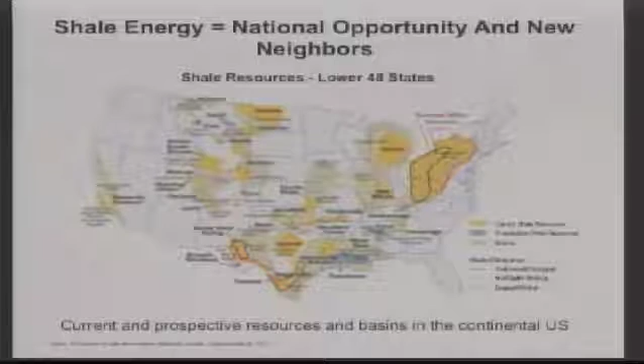We've got a great opportunity in this country with these shale areas to become energy independent. We're already, I heard the other day, number one in oil production, which I found hard to believe. We're building up a great reserve of natural gas. We're looking now to export natural gas rather than import it. But that being said, we've got to do it in the proper way and be careful and be safe. We owe it to the people that live around us and in our neighborhoods to do the right thing. So, again, I want you to understand that we think we're trying to do the right thing moving forward.

There are three phases - you all know the three phases of gas transportation. Understand that every stage is regulated in some aspect, not necessarily by DOT. You have your upstream, your exploration and production, your midstream, which is where your gathering falls. We take the product out of the ground, we treat it, we compress it, and we deliver it to the downstream transmission companies that carry it cross country and deliver it to you folks for your everyday use in your homes.

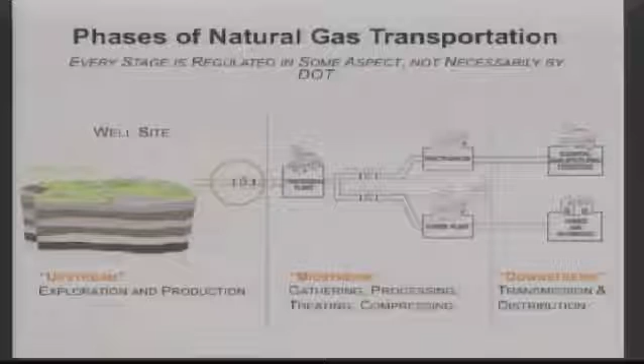Who oversees the safety of gathering lines? Well, the federal government ultimately starts the process. They have jurisdiction over all gathering lines, but some of those are exempted from the requirements found in Part 192.

States, and many, as you'll see here, have gone over and above the federal government. States can have regulations more stringent than 192, not less stringent. States are looking at these lines and deciding if and where they need to be more stringent, with regulations over and above. We're seeing things like construction reporting, additional corrosion control requirements, and most companies putting their lines in damage prevention programs and including many of their assets in public awareness.

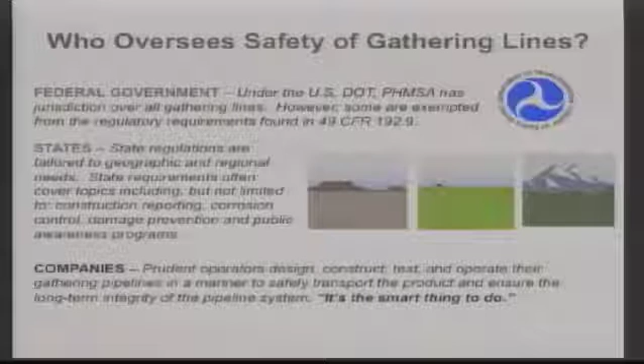As a company, we want to design, construct, test, and operate those gathering lines in a manner to safely transport the product and ensure the long-term integrity of our pipeline systems. It's a smart thing to do. If we're to promote the use of natural gas and these resources in this country, we don't want to have the negatives, the consequences that Carl talks about. Those are bad for our business. They're bad for everyone involved.

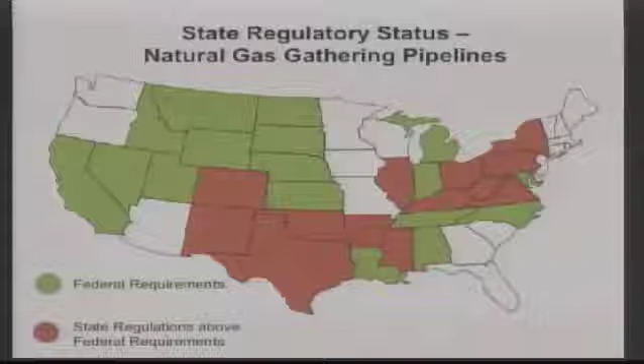Here are the states that you'll see in the reddish color that have some regulations over and above the federal requirements. We think these states do have some gathering or production. For example, the state of Ohio is taking it upon themselves to make all Class 1 gathering associated with hydraulic fracturing, the new stuff going in the ground, regulated. We're going to talk about class here in just a second. But it'll give you an idea that there are states out there that are active.

And for the most part, most gathering lines are intrastate pipelines and would fall under the auspices of the state agency that works with PHMSA.

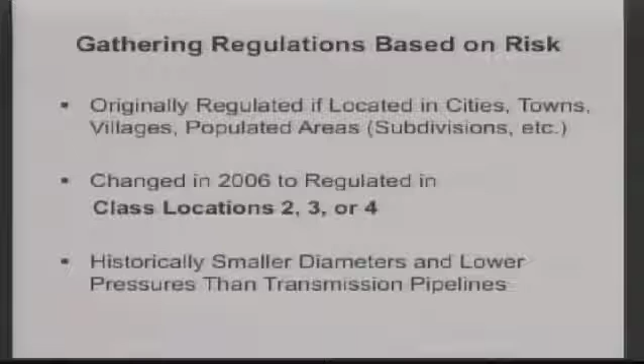Traditionally, gathering lines have always been based on risk. The original rules that came out in 1970 said that if a gathering line is located in a city, town, village, or populated area, such as a subdivision, that portion going through those would be regulated, associating the regulation with population density. With the gathering line rules changed in 2006, that was changed to say we, the federal government, will regulate gathering lines in class locations 2, 3, and 4. But those, again, in the past, have historically been smaller diameters, lower pressures than transmission pipelines.

Class location, many of you are familiar with the term. If you're not, I know there's a lot of pipeline folks in the room, and this is old hat to them. Keep in mind that we keep hearing this risk-based concept. Bill Bird talked about it this morning. Class location has been a risk-based concept in 192 since 1970. PHMSA is even talking about changing and getting away from class location. I don't see how you will ever get away from a risk-based approach involving population, because that's where you're most concerned.

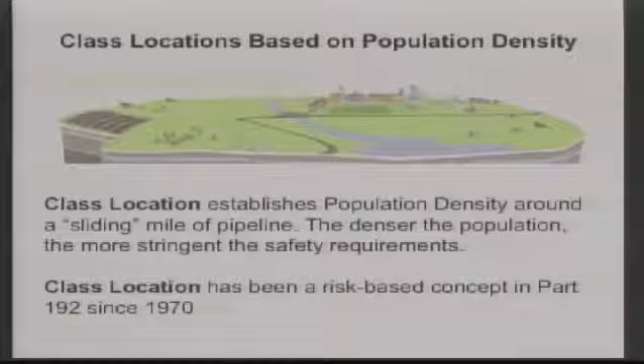What it is basically is it takes a sliding mile of pipeline, you lay a 220-yard boundary on either side, and the number of buildings intended for human occupancy inside that given mile establishes class location. Class 1, which we are further not regulating, has 10 or fewer houses, or places for people to live, inside that mile.

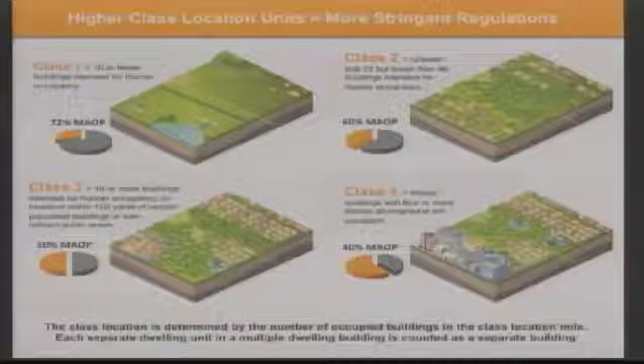Class 2 is between 10 and 46. Class 3 is 46 or more homes, you're getting into your subdivisions. Also, Class 3 covers where you have public buildings or well-used buildings that have 20 or more people there for 10 weeks in a given period or whatever. So it does get closer as you go forward.

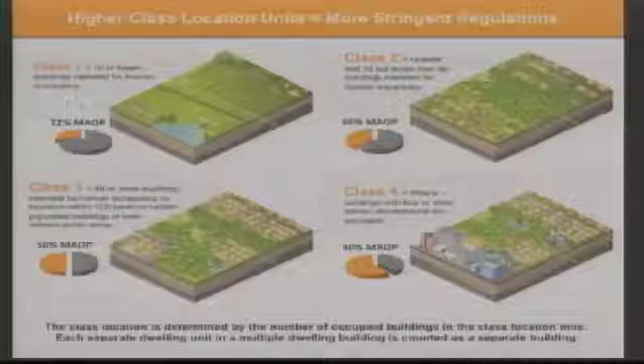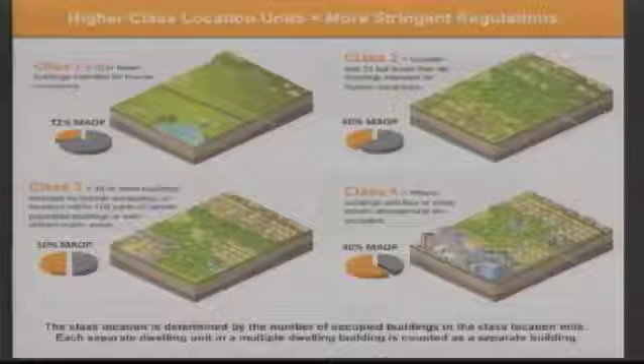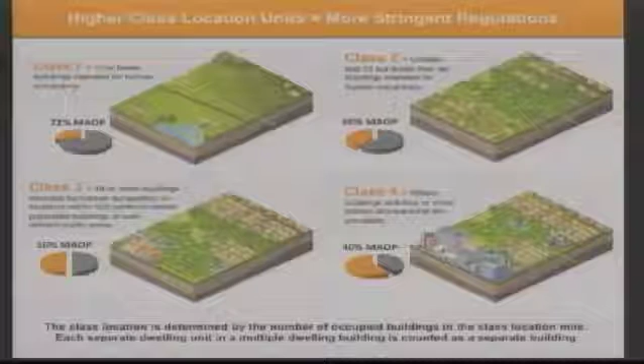Class 4 is where you have your downtown areas, with buildings of four or more stories prevalent. Most of your gathering is going to fall in Class 1 and Class 2. Very little gathering is in Class 4. Even in Fort Worth, where we have a large footprint, we only have one pipeline, and it was a pipeline we acquired that falls in a Class 4 location. So we're concerned with Class 2 and Class 3, looking for areas that would qualify for Class 3. Because if you see those little numbers there, 72% MAOP, 60%, 50% MAOP, those are safety factors that we have to be concerned with in designing a pipeline for a class location.

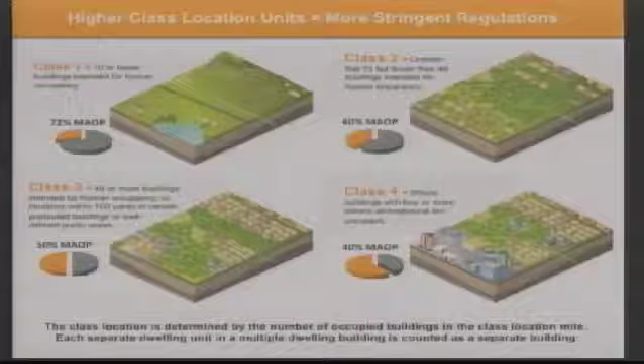So why the current focus? I've been in this business for a long time. In fact, when we were talking today about how much experience we would have in these gathering companies dealing with pipeline regulations, they said, oh, we've got about 50-something years of experience. I said, that's great. And then I realized 40 of it was me.

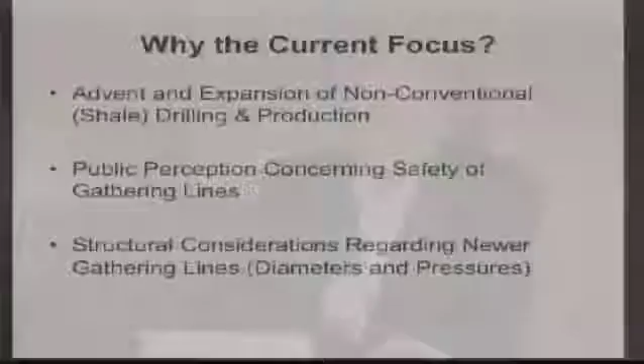So the current focus, obviously, is when fracking, non-conventional shale drilling and production came into play, which incidentally happened after the latest rule change regarding gathering. People started getting attention. Laying pipelines, again, in a populated area in Fort Worth, and thinking these things were being laid pell-mell with no oversight and no concern gave the public the perception that these lines aren't safe.

To make these lines safe, we've got to be sure they're regulated. Well, that may be something that comes down the road, but again, a prudent operator is not going to put junk in the ground. Keep that in mind.

A lot of the consideration of what Carl just said is these newer gathering lines are larger diameters and the same pressures as transmission lines. So I want to kind of assuage you a little bit on some of that.

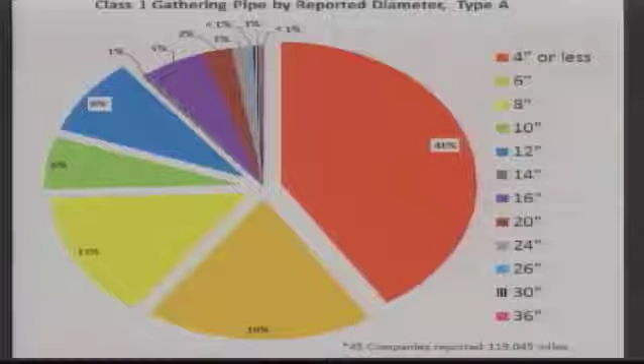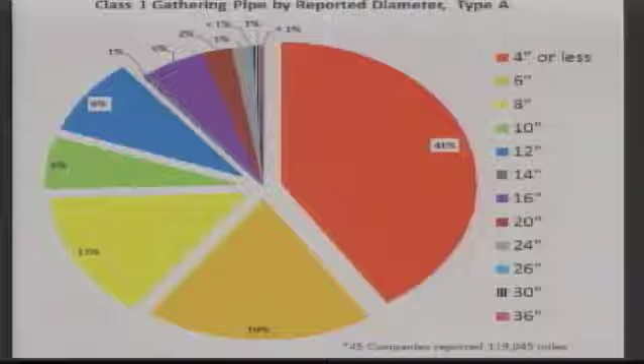But if you look at that chart, about from the 12 o'clock position around to about 9 o'clock, it shows that 73% of the lines reported are 8 inches or less. And 8 inches, a lot of those 8-inch lines are in your distribution mains. There's not a large percentage of the larger 16 to 24-inch pipelines that you see.

And what about pipeline pressures? Well, Carl said he hated math, but Carl, we've got to give you a little math here. The design formula for a steel pipe in 192, you design based on basically three parameters.

The specified minimum yield strength, or what the code calls SMYS, in pounds per square inch - that's a function of the steel you buy, the strength of it basically, the wall thickness of the pipe, and the nominal outside diameter.

So the F factor is this class location design factor you saw previously. It basically says, if you have a pipe designed to 100% of its yield value, then you automatically have to reduce that to 72% for Class 1, on down to 40% for Class 4.

Many of your gathering companies now are actually designing all of their pipelines, regardless of class locations, for at least one class location more than what's out there. So not as much at 72%, quite a bit at 60% and 50%.

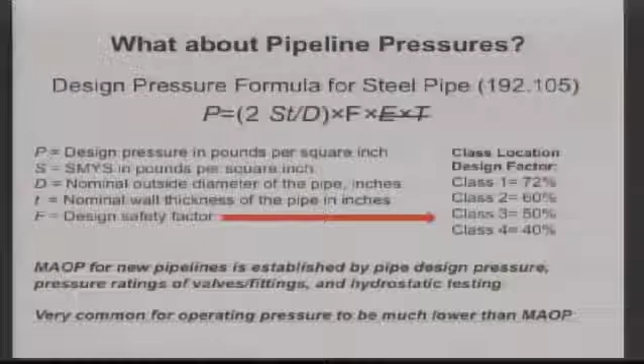That will give you an MAOP value, and that's really how an operator kind of values his system - I've established this MAOP of a certain amount, and down the road, if we need to sell it, that's one of our selling points. But notice, it's very common for your operating pressures to be much, much lower than your MAOP for most of us in this business.

And I'll give you an example. Let's take one of these larger pipelines you think's out there, a 16-inch diameter pipeline, with a 0.375-inch wall thickness, and a SMYS value - it's X65 pipe at 65,000, and I'm designing it for a Class 3 location, which means I'm using a safety factor of 0.5. That would yield a pressure of 1,523 pounds, which would be 50% of its specified minimum yield strength.

However, a real-world example - and I said Company X, but this is basically my company - this pipe is used on the upstream, or what we call the suction side, of compression. In gathering, the upstream side is where your gathering occurs. When you have a final stage of compression and you discharge that to your customer, to the transmission company, the discharge pressure will be higher, and it will approximate or be close to those values that Carl mentioned - equivalent to a transmission company, because that's what pressure you have to get into their system.

Even though we have a 1,523-pound design pressure, the components we're using are rated by what we call an ANSI series, American National Standards Institute, of 300, which is basically around 740. We're going to try to establish a MAOP for this line of 715 pounds, which means we will test it for 8 hours or more at 1,075 pounds. And we get that test pressure by taking a Class 3 factor of 1.5 times the desired MAOP of 715.

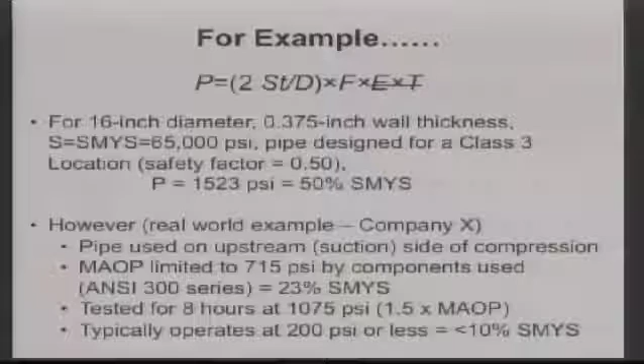Even so, we don't operate that line anywhere close to that. Talking to our folks in the area, this line typically operates around 150, and I put in here typically operates at 200 pounds or less. Notice that at 200 pounds would be 6% of its specified minimum yield. So you have a tremendous cushion between what this line's operating at and what its perceived maximum allowable operating pressure would be.

In today's world, take comfort in knowing these regulations have been out for 40-something years. There haven't been a lot of changes in these regulations as far as technology, but there's a lot of stuff out there a lot better than it was 40 years ago. We've got new pipes, inline inspection, better welding, better coatings. We've got SCADA, a lot of things out there in our favor, and we're using these to design these lines and be sure they're state of the art.

We're also aware of what 192 says, and it would be foolish not to, if you're a prudent company like we think most of us are in this room, to use 192 to help us design. So we will meet those standards or exceed them for things like welding, how much cover we put on it, hydro testing those lines, and quality assurance.

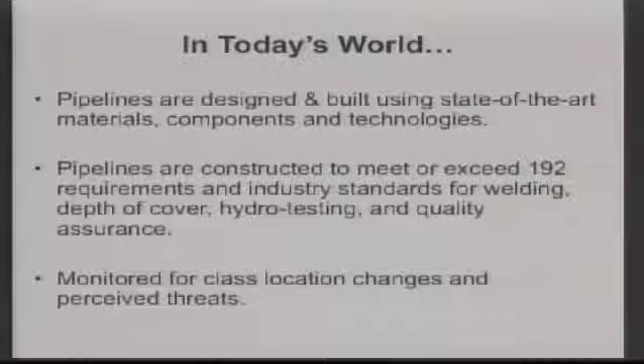We even go beyond and think of some of the things we thought were going to be required of us, like putting our lines in the one-call system, marking our lines like the code requires, putting cathodic protection on our lines like the code requires, putting these lines in public awareness, things that technically we would not be required to do on an unregulated line. We're doing it because it makes good business sense.

Then we monitor these lines for class location changes, so if we do have to make any adjustments, and perceived threats. A lot of talk about encroachments and concerns building over pipelines. That is a perceived threat to us, people digging into our facilities. We heard talk about the farmers this morning, a real concern for us. We try to work with those people, work with the emergency responders. We're doing a very diligent effort working with the public and with organizations like Pipeline Safety Trust.

Again, looking forward, the folks I work for are always going to take steps to protect people, environment, and integrity of our system. Our CEO has what he calls the 000. He wants zero incidents, zero motor vehicle incidents, zero injuries, because he says he can't bear to look someone in the face that doesn't go home that night and is injured.

We'd like, though, when PHMSA looks ahead and starts developing regulation on gathering lines, to continue using this risk-based approach. It makes most sense. You need to put your resources where they will do the most good. Looking at things like our biggest threats to pipeline companies: damage prevention, corrosion. We're taking care of the corrosion, but we need help from a regulatory standpoint looking at our risk-based approach. One thing that would really help us, I don't know if we'll ever achieve it since we're in so many different states, is a consistent application of gathering line regulations.

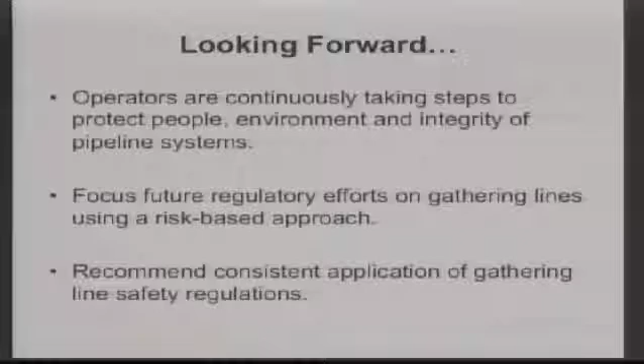If I could, I'd like to give an example. As I said, we're intra-state, and we're all going through public awareness inspections right now. Harold told you this morning that states have to have theirs in by the end of this year. We went through 5 different states. The first 4 cited us as having one of the best programs. Actually, the state of Texas said we had one of the best public awareness programs they had reviewed so far. The 5th state said this program's unsatisfactory. It's hard to understand why 4 states would think it's great and 1 state would find what we thought were minor problems with it. So consistency in application from an inspection standpoint is a big plus in our favor.

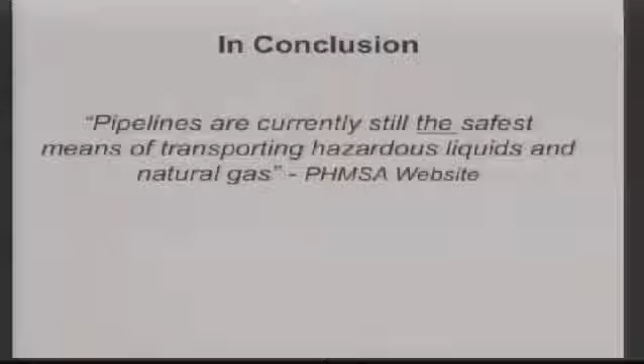In conclusion, we said this before: pipelines are currently the safest means of transporting hazardous liquids and natural gas, and it's our role to keep it that way. Thank you very much.